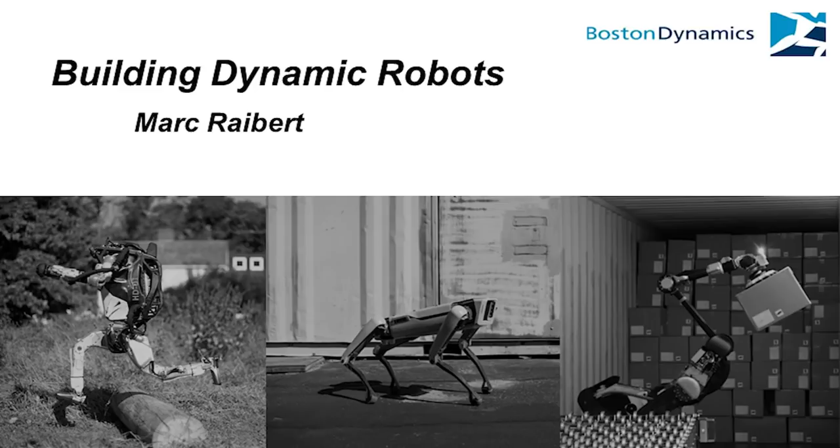But before I do that, I'd like to set some context. And the context is how to think about intelligence. At Boston Dynamics, we've been focusing on what I've been calling athletic intelligence. That's intelligence about how we use our bodies, our ability to walk and balance, the knowledge of our bodies that lets us do energy efficient motions so that we can travel further or actually be stronger given the hardware or the meatware we have to work with. And it lets us maneuver in real time in the world.

Imagine playing basketball or ice hockey or whatever your sport is, the way you can maneuver among your opponents, not collide, go around. All those skills are a very tight connection between our bodies, our sensors, our brains, and I've been calling that athletic intelligence. Most of us aren't real athletes, but we all exhibit and rely on a great deal of athletic intelligence. The other kind of intelligence is cognitive intelligence.

That lets us plan activities. For instance, when I was flying and I'd want to get to the airport on time, I'd have to plan out, okay, it's rush hour. That means it's going to take this long to get from my house to the airport. You have to get there 45 minutes early or whatever it is. And so you go through this sequence, and that's cognitive intelligence. And I think, frankly, most artificial intelligence that's being studied now is more on the cognitive side.

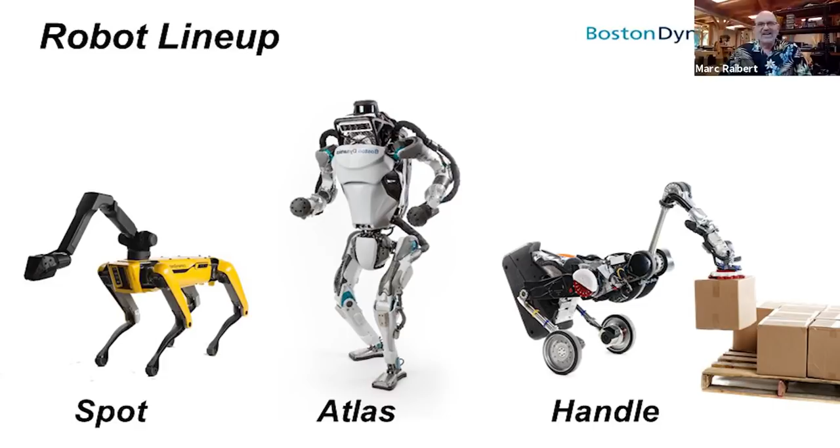These are the 3 robots that we've been working on at Boston Dynamics in recent years. There's Spot, Atlas, and Handle. Handle is a logistics robot. I'm not going to talk about that today because there's only limited time, and I'm going to focus on Spot and Atlas. And these really represent 2 different major thrusts from our company.

After many years of work on probably 8 or 10 different quadruped robots, we are commercializing a productized version of that. And it embodies athletic intelligence the way I've been describing, but it also is a host that other people can put their cognitive intelligence on top of. And I'll be showing some videos of what Spot can do and how people are using it.

And then Atlas is a research platform that lets us explore the present and the future of dynamic control in robotics. And we've been working on not only producing more and more behavior, but also techniques that let us rapidly create new behavior. And so I'll give a little bit of discussion of that. The other thing about Atlas is it's a platform that shows how important hardware can be in robotics. I know in the AI world, software is king, but it's not all about software in robotics. The hardware is just as important, and I'll say just a couple of words about that.

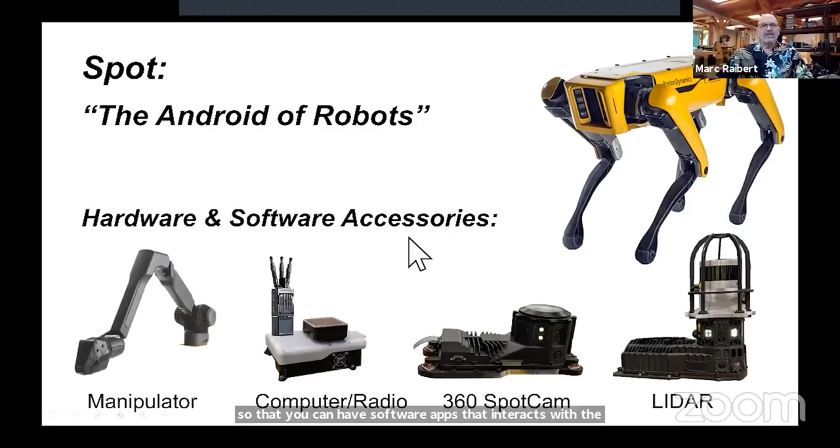The control system for Spot, there's really a lot of different things going on, but I think you could cover the essentials in talking about 4 layers. The bottom layer is servos that control the joints and kinematics that can be used to coordinate the joints.

One level up is something that's worrying about the dynamics, the balance, the stability of the robot. And, you know, 4-legged robots that move quickly are really very complicated dynamic machines. And we've been using an approach called sequential composition, which allows you to break up the very complicated dynamic space that's composed of both the physical configuration of the robot, but also the physical configuration of the task. You can break that up and separately come up with controllers that have some desirable properties about stability as you do switching between the regions.

And Al Rizzi and his coworkers before he came to Boston Dynamics really provided the foundation of sequential composition. And we've been expanding and building that. And it's been a great thing for us.

The next layer up is something that uses the visual system to analyze the terrain around the robot and then decide how to move the body and how to move the feet in cooperation with whatever the user is asking the robot to do. And so this little picture shows a body obstacle, foot obstacles, desired footsteps, and then quadratic programming is used in a repetitive manner, I think 10 times a second. It looks out to a limited horizon, doing quadratic solutions, and then adjusting the foot placement, the body path, to keep the robot balanced, but to keep it on course the way it's supposed to go.

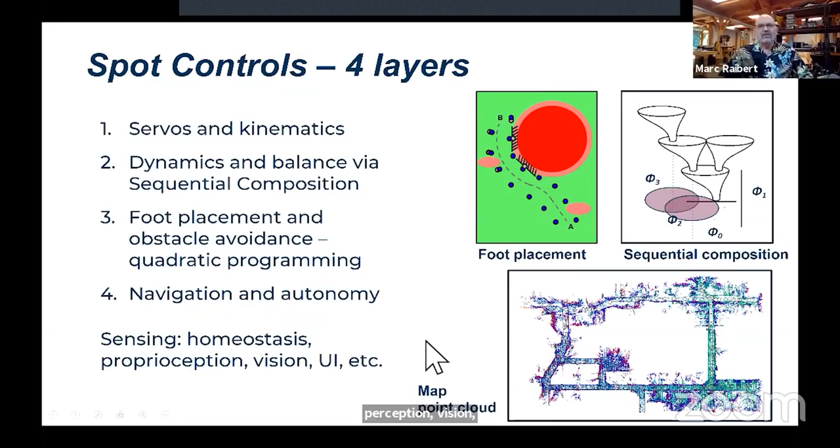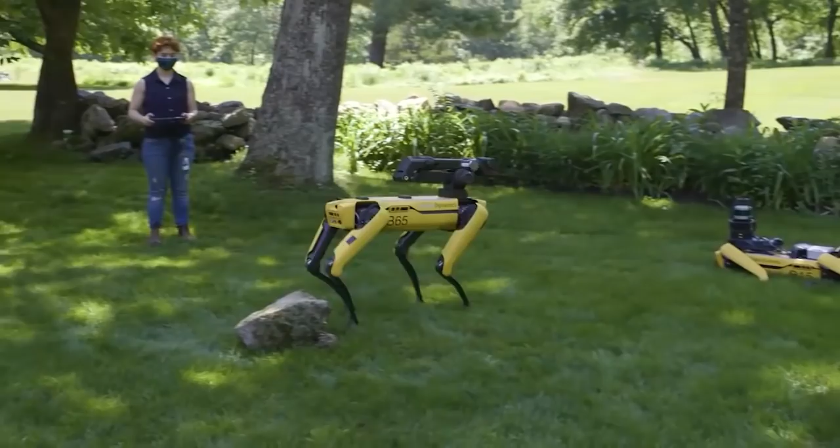So here's just basic Spot behavior in case you've never seen it before. The robot has a bunch of different walking gaits that it can use and running. It's got cameras in the front and on both sides and in the back. I'm showing those cameras. Those are stereo cameras. And when you put all that together and all the control I just mentioned, the robot can step over things that it sees. It can do it backwards, sideways.

It can avoid obstacles. In this case, I'm an obstacle. Daniela has a controller and she's steering, but she's just telling it to go straight ahead at me. And then the robot sees me and moves around using that quadratically programmed foot placement algorithm and body placement.

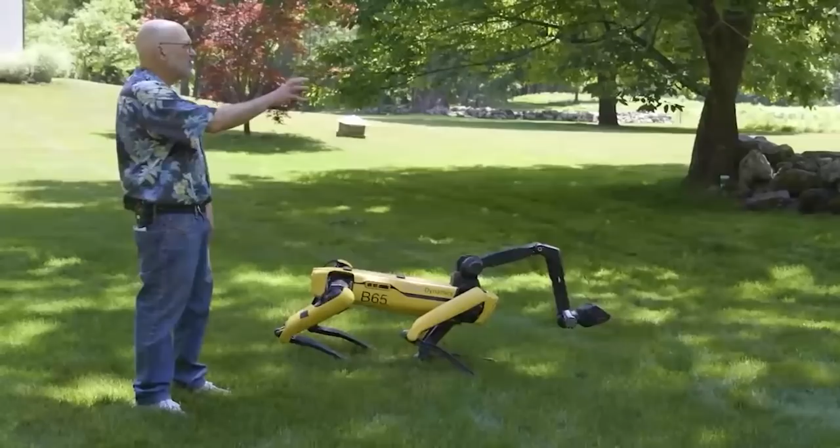And we also have an arm, and I'm really excited about the potential of an arm on a moving base like this that can pitch, roll, and yaw, and also travel, in order to extend the range of the hand.

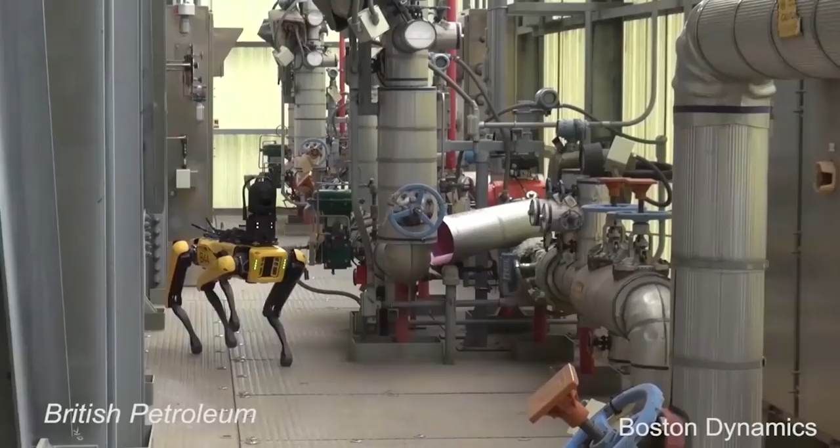And this is just a quick example of the autonomous traversal. We previously ran the robot around this building and collected point cloud data from both a LiDAR and the onboard stereo. And here it's doing matching between the real-time data that's coming in through the sensors. And so you're sort of seeing inside Spot's brain, and it's matching that against the data that was collected at mapping time. And that allows it to go on traversals such as this. But now we're using that to traverse very complicated sites, which I'll show you shortly.

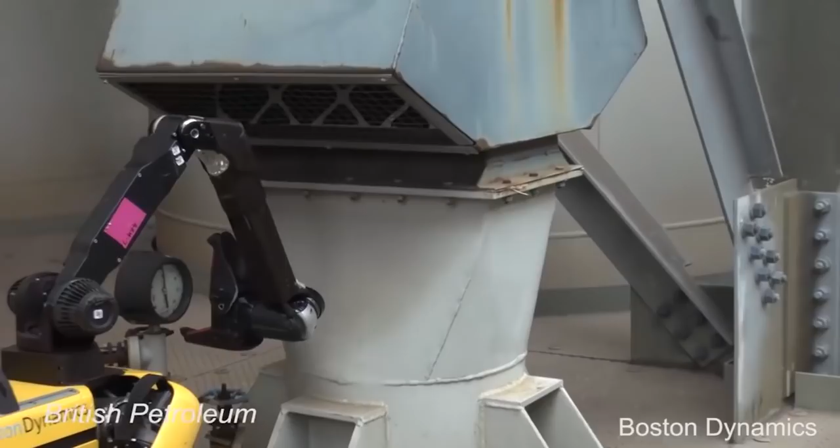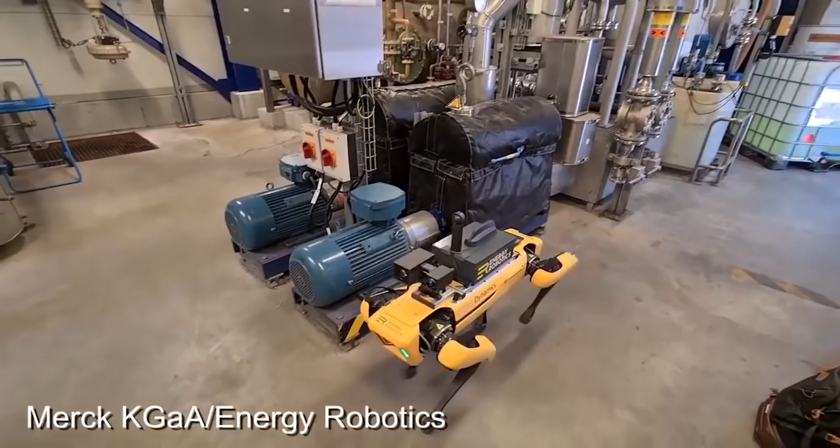In fact, this video is showing real-world applications, in some cases tests, and in some cases deployed applications of Spot, where we're working with customers. We're relying on the athletic intelligence of the robot combined with sensors provided by the customers, or in some cases, cognitive AI that's being run in apps that's externally connected to the robot.

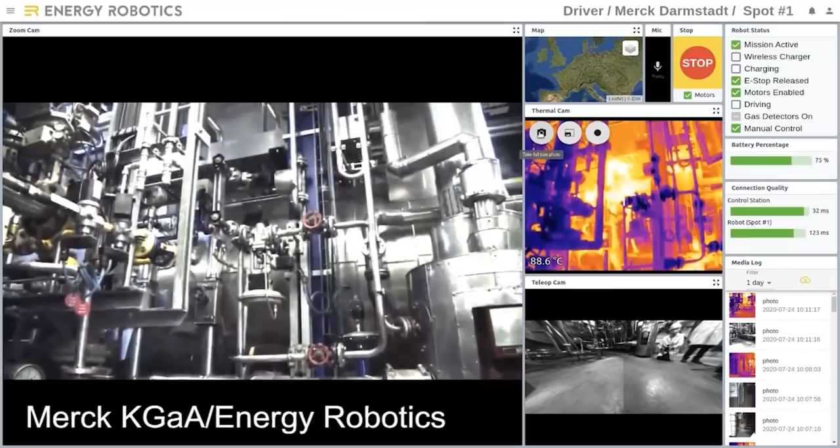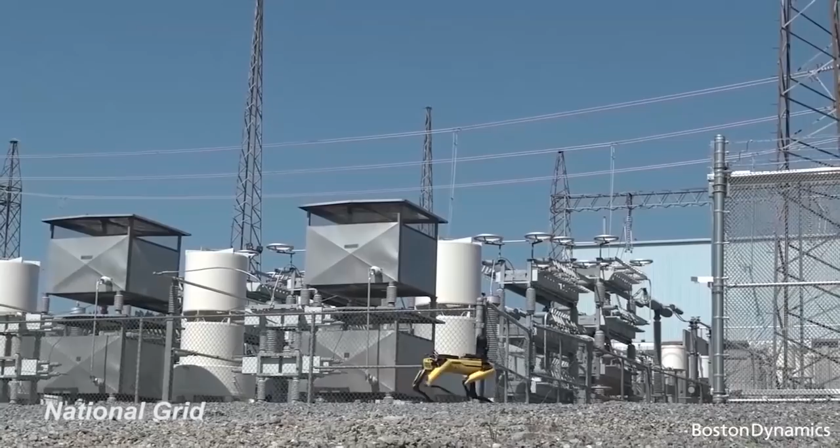That was a British Petroleum refinery in which there's many inspections that are currently done by humans, but it's really unpleasant and somewhat dangerous in these places. This is a Merck facility where they're interested in assessing the performance of some of the machinery without having people have to go there and be exposed to the risks.

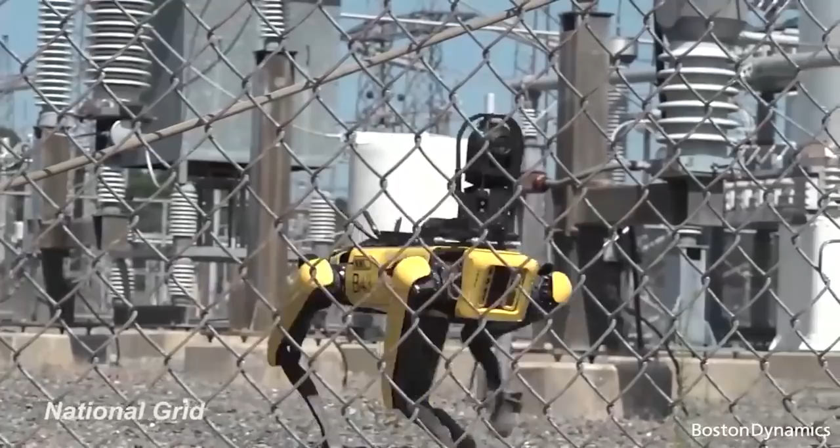This National Grid facility has places where humans aren't allowed to go when they're powered up. And so they can't do inspections except when the place is powered down. They use our robots to do it.

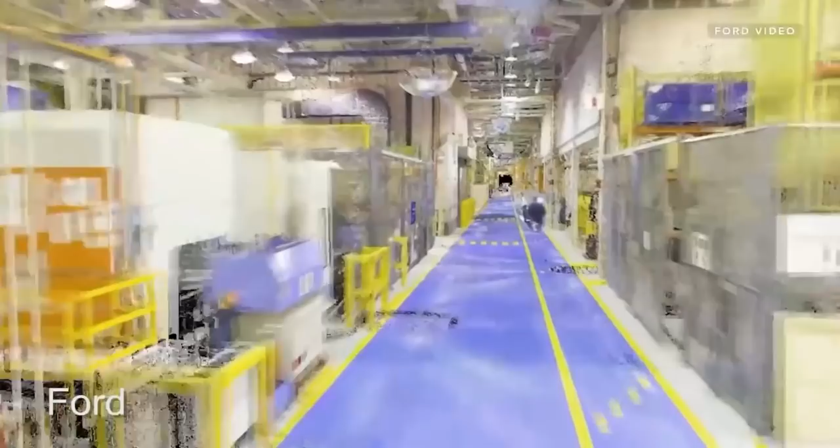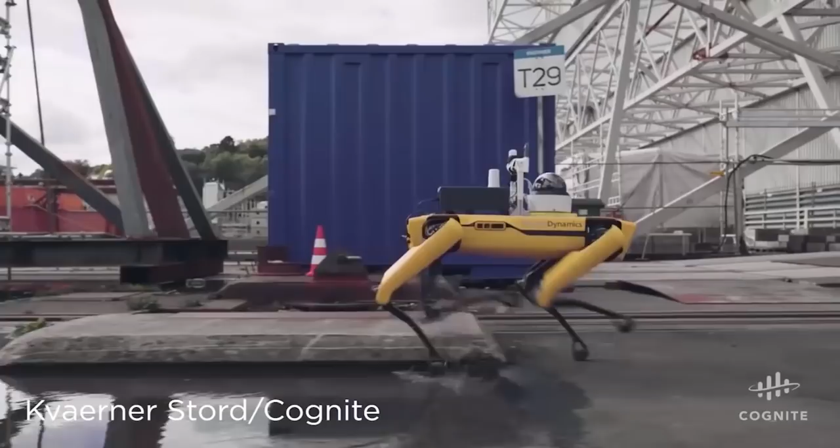So that's dull, dirty, and dangerous. This is construction industry where there's an interest in collecting maps of environments that are being built on an ongoing basis. This is Ford mapping some of their facilities using onboard sensors. And I believe that using sensors on Spot is going to provide better data more often, more reliable than can be done with people carrying the sensors, which is how it's usually done now.

This is a facility where there are tens of thousands of components; they're creating oil rigs and refineries and things like that. And they have to keep track of all this stuff. So they're using systems that collect data from the robot and then organize it all so that managers can have a better view of what's going on.

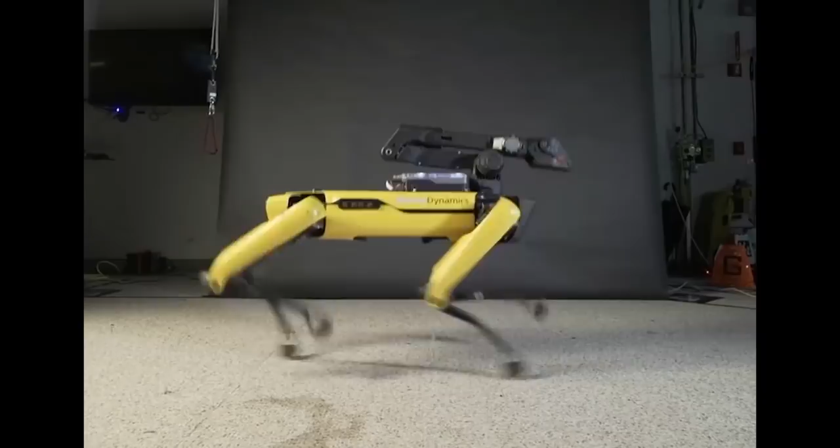This is just a charming test application of Spot. You've got the boom, baby, give me some room.

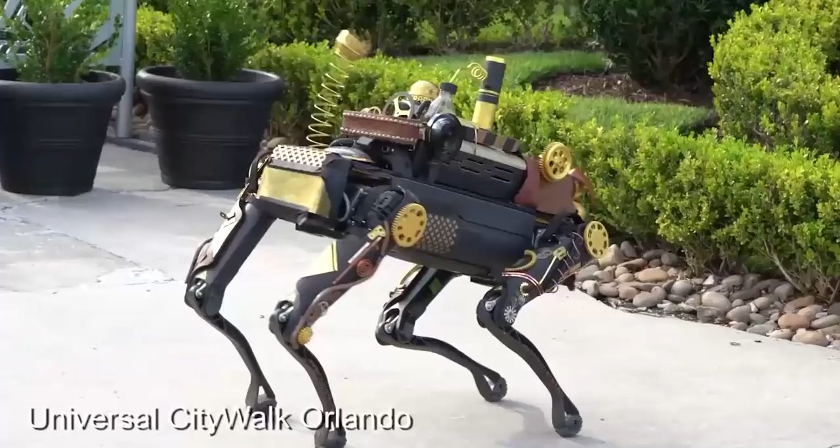You know, about a year ago, we made Spot do some dancing. And Spot dancing has stimulated a variety of applications. You know, the fans can't go to baseball games anymore. So the SoftBank Hawks bought 20 Spot robots to do a little dance performance to liven up the event.

And if you'd like to see a Spot live, you can go to Universal CityWalk this month. They're testing out a kind of steampunk version of Spot, and they have it combined with some human performers in order to entertain visitors to the theme park, which has just opened back up. Universal is doing a bunch of other stuff, which isn't public yet, but I'm really excited by it. And we have other customers who are interested in entertainment uses of robots, and it's going to be interesting to see how that develops.

But you know, back to one of the themes of this mini series of lectures, COVID. One of the things we were able to do a few months ago was apply Spot to a COVID problem. Some of the researchers at the Brigham and Women's Hospital here in Boston, who are emergency room people, came to us and to some researchers at MIT with the idea that rather than screening potential COVID patients live, they could screen them with a robot with some telepresence, plus have sensors on the robot read vital signs. And so we very quickly got a robot instrumented.

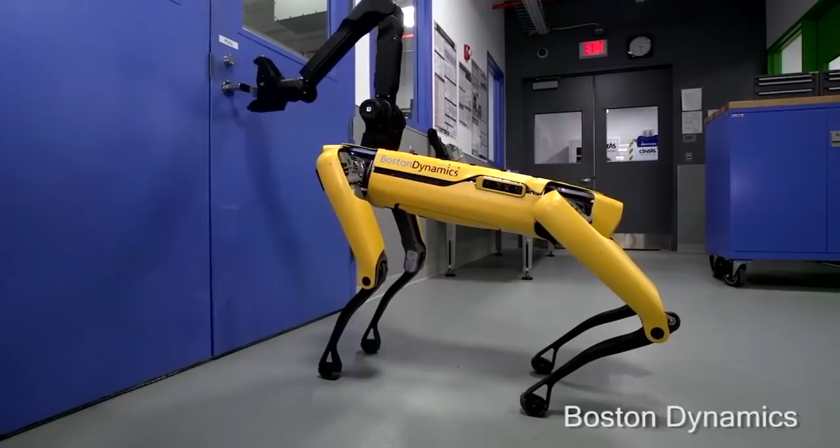So I wanted to show just a little bit of what I'd call futures for Spot. Right now, you can't buy a Spot with an arm on it, but it's going to become available very soon. And I'm really excited by that. The new arm is really fantastic, very lightweight. This isn't even the production version. This is a video you may have seen 6 months ago.

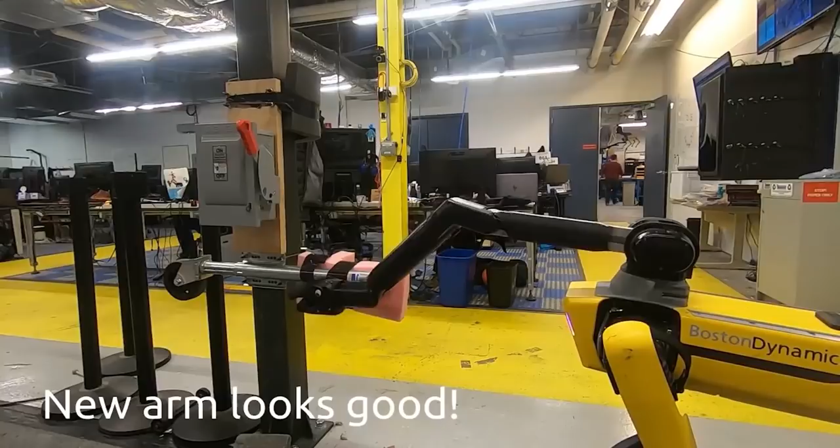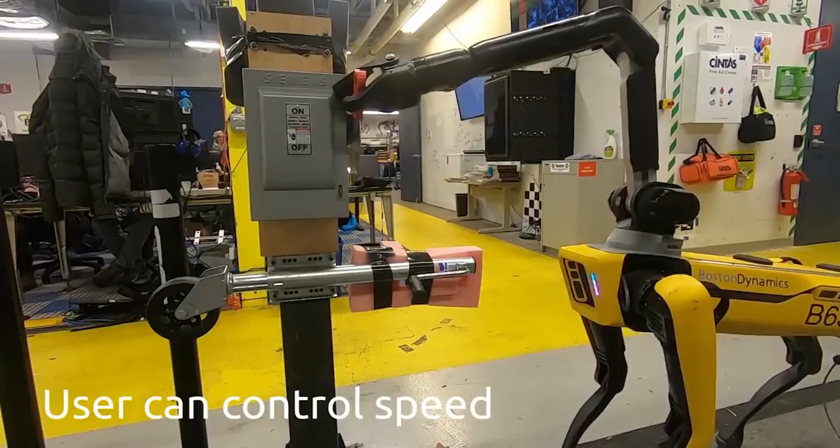But developing the athletic intelligence for the arm is a huge challenge. And I think that users are going to have to do a little more of the athletic intelligence. And of course, we're trying to provide the right kind of interface for the cognitive intelligence of doing mobile manipulation. We've been doing some experiments, and it's really fun to see all the different kinds of things you can cook up when you have a mobile base and an arm. Here we're dragging furniture around.

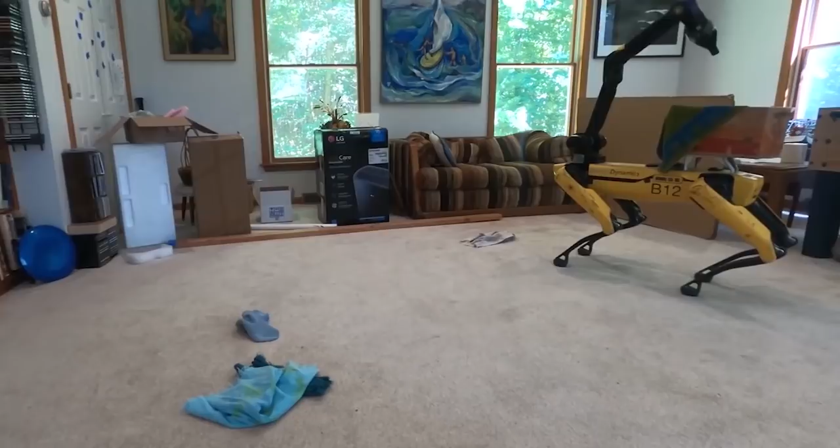We've dragged some heavier furniture. This is an interesting demo. We have 70 people with robots at home. So one of them decided that he would use the robot to clean up his house. And so he's got some off-board vision, so basically cloud-based vision, looking at the view from the cameras in the robot and identifying things that shouldn't be on the floor.

You'll see the view from the cameras on the robot. It's identified this as a mess. And so then the robot figures out how to get over there and get the hand and do grasping. There's all kinds of grasp pose calculations going on in order to make this work. And then it's collecting the stuff.

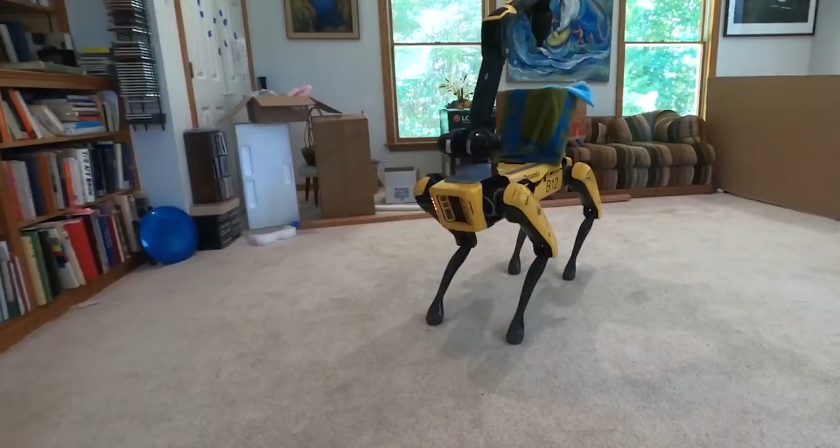So I don't know about you, but when I had a house full of kids, I would love to have a robot that could go and straighten up the house. Even without kids, I'd like to have a robot to straighten up. Don't get me wrong, we're not selling Spot as a home robot. It's really not there yet.

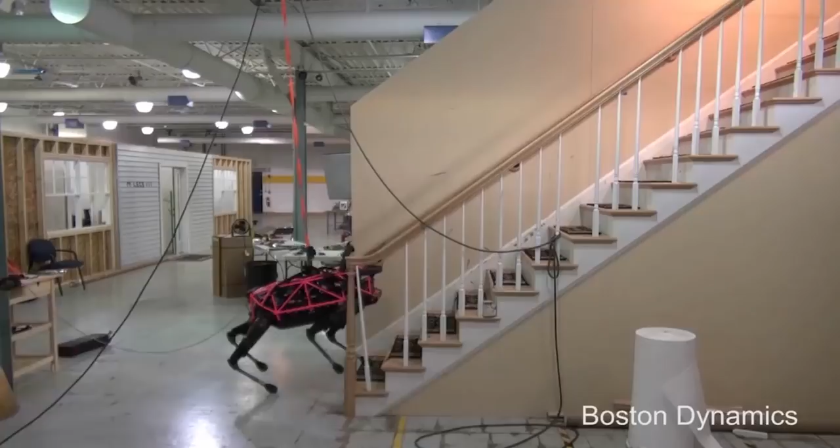And I wanted to go back to a theme of the control that I didn't talk about before, which is robust control of the robot. One of the things that we've been working really hard on in our athletic intelligence is making it so the robot can perform the task even when the situation isn't precisely what we had planned. So here, our engineer is kind of disturbing the dynamics of the situation. And then we have programming that can deal with all those situations and get it back on task.

Here's another example. The robot's climbing stairs using the foot placement algorithm. But an unexpected force is moving the robot during the climbing, and the robot can recalculate using sequential composition to use a bunch of different controllers that work in the outlying areas and bring it back.

This kind of demo is one of the reasons I think that athletic intelligence, at least when it's implemented in a full-blown way, can make it much easier for cognitive intelligence to function. If the athletic intelligence can deal with a wide variety of circumstances, the cognitive intelligence can plan in a simpler world and be faster, maybe more complicated by having bigger environments that it's doing its planning or reasoning or recognition type functions in.

So I'd put this question at this point in the talk: do you agree that athletic intelligence makes cognitive intelligence easier to implement and more effective?

Do you want me to switch over to the Slido again, or people can? We'll just leave it like this. Have to unmute. Yes. So I think we've got a response to that question. So I think people can still continue to vote, but I would keep going.

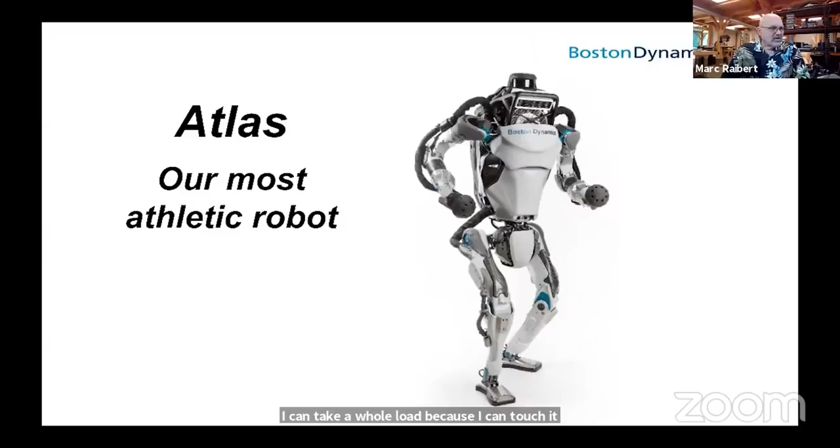So I know I'm going long on time, but I'm going to just say a little bit about Atlas. And one of the key points about Atlas, and really all our robots, is hardware is really important. And in today's world where there's so much being done in a fantastic way with software, I think people lose sight of that. And they think that software will solve all the problems of the physical world. And I believe that the right approach is to make the hardware absolutely as robust and capable and advanced as you can. And then software will embellish it and take it even further. But don't start with crummy hardware and hope that software will make up for all its failings. I think the problems to solve in robotics are too hard to rely on that approach.

So given that, we've done a ton of work on Atlas. We have a power system that involves a very compact hydraulic power unit that has motor, pump, reservoir, filters, all in a 5 kilogram unit that can produce 5 kilowatts of output. Very advanced battery pack with all the kinds of things you'd expect in a sophisticated battery system.

And we've also built our own hydraulic servo valves that are much more efficient, that have some circuits that do computing that are particular to robotics that people who use hydraulics haven't needed in the past. We've also jumped in with both feet for using 3D printing to make our robots much smaller and lighter. So we've been embedding actuator components, hydraulic pathways in the limbs.

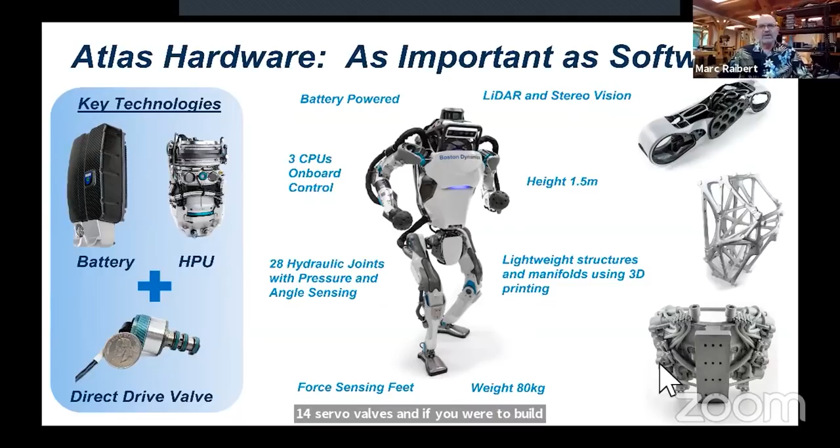This is a manifold that supports, I think the number is 14 servo valves. And if you were to build this out of separate fittings and hoses and mounting points, you'd end up with something that weighed 3 times as much. And using these techniques, we were able to go from the first humanoid we built, the one that was used in the DARPA Robotics Challenge about 3 years ago, maybe 4 years ago, that weighed 375 pounds. We've been able to get it down to just about my body weight, 165 pounds and form factor.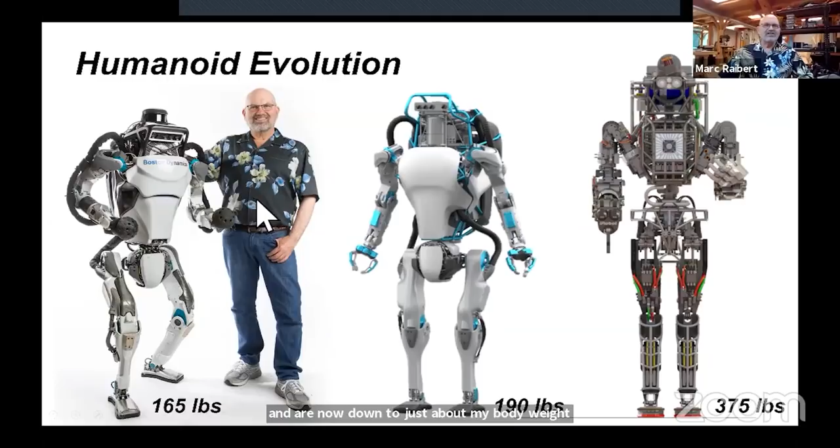I think the current one might have put on a little weight. I actually lost a little weight. So Atlas might be heavier than me today.

And then what about controls? I am just going to touch on the controls in Atlas, and I'll give you a reference to another video that Scott Kuindersma made recently that really goes into lots of detail in how Atlas works.

But the basic approach we've been using for the athletic behavior I'm going to show in a moment is to build up a library of highly optimized behavior where we use model predictive control and other optimization techniques to figure out what set of trajectories, actuation, and servos can produce these dynamic behaviors. Then in real time to use vision to assess what the scene is, find footholds or handholds in some cases. I'm not going to show any handholds today. And then come up with a behavior that fits elements of the library in sequence into the action. And it actually does this fitting in real time.

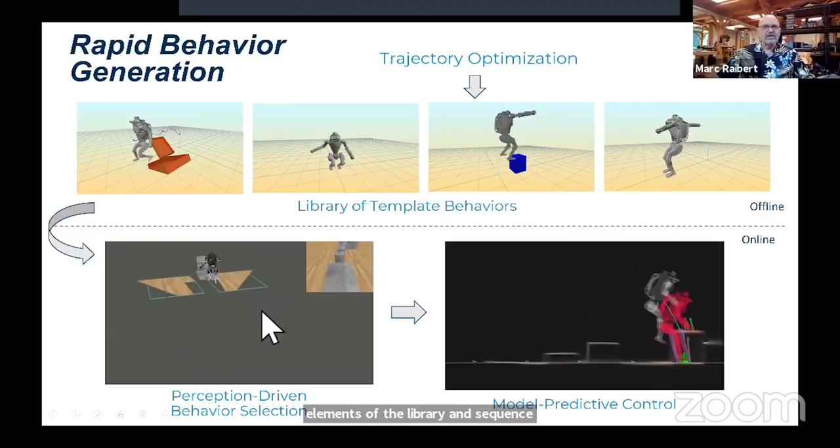And if you look at that from an optimization point of view, there's an offline part of the process. First of all, we deal with the core dynamics of the limbs of the robot, and then take into account the kinematics that are determined by the task we're trying to perform. We do offline optimization in order to come up with the elements of the library. And then in real time, we stitch those together. We stretch them and shrink them in order to fit the exact real-time situation in order to perform.

And I encourage you, if you're interested in the technical elements here, to go watch Scott's YouTube video that was put out just a couple of months ago, and you can search on this title, Recent Progress on Atlas, the World's Most Dynamic Humanoid Robot. Really a very nice presentation.

So Marc, can I just quickly ask a bit of clarification here? I think there's been tremendous interest in this aspect from lots of people. So when you do the offline versus online computation, what is the granularity of the dynamics you use in each of those stages? Are these centroidal dynamics? Are they full dynamics? Is there some abstraction at each of these levels?

So I think one key point is that in the offline version, they're much less abstracted, but there's always abstraction. In a robot that has as many links and as many joints, I think there's 28 actuated degrees of freedom, dealing with the whole dynamics, plus the change in contact dynamics, the compliances, a lot of the behavior is determined by actuator limitations. So you're up against constraints in the strength, in the range of motion. All those things vastly complicate calculating anything about the dynamics of these robots.

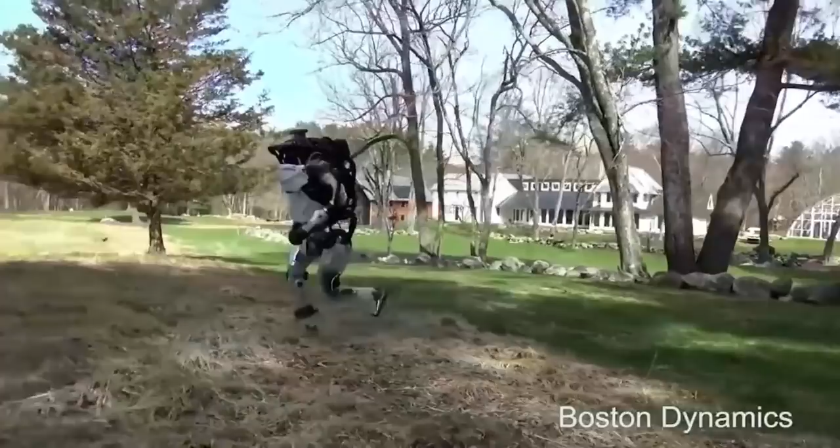We're doing a production right now, which I'll tease you about because you'll see it by the end of the year, I hope, that has these rapid generation techniques, and it's really paying off. We can turn around new behavior in a few hours where it used to take days, weeks, and sometimes months. So let me just show, this goes back a ways. Some of this stuff goes back a couple of years.

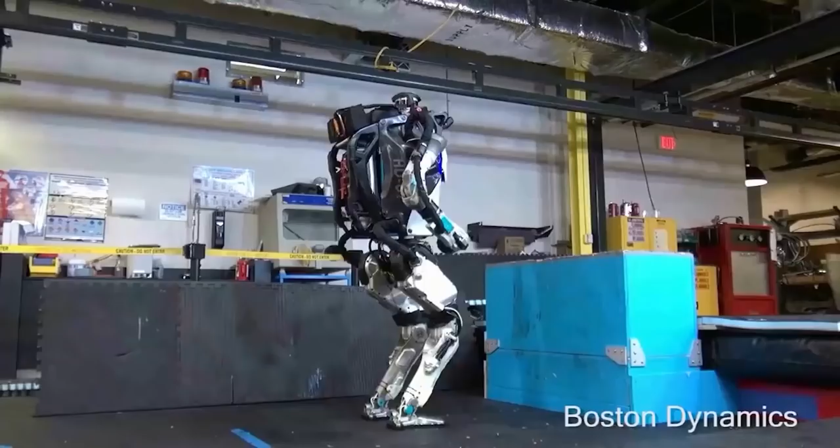This might be one of the most dynamic maneuvers we ever did, but there's very little vision being used here. This was all planned out in advance. There's obviously control going on in order to stabilize in the scenario. Here's the first time we did gymnastics with rolling type behavior, where we have contact not just with the feet, but with the hands and the body.

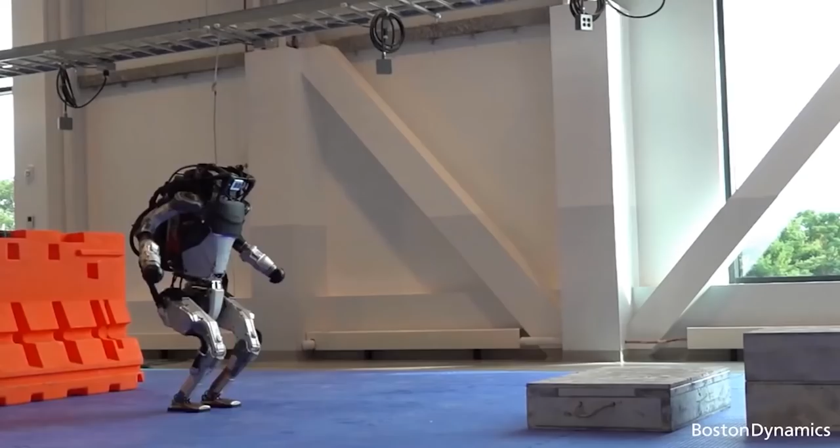That jump was done with some of these optimization techniques. Here's another one that's very hard to perform, and the optimization is really paying off. And this was just done recently. Here, vision is being used in real time to locate the boxes. Someone could actually go and move the boxes while the robot turns around, and it would run back and see them. I'll show you a little bit about what the visualization of the vision system looks like when it does this.

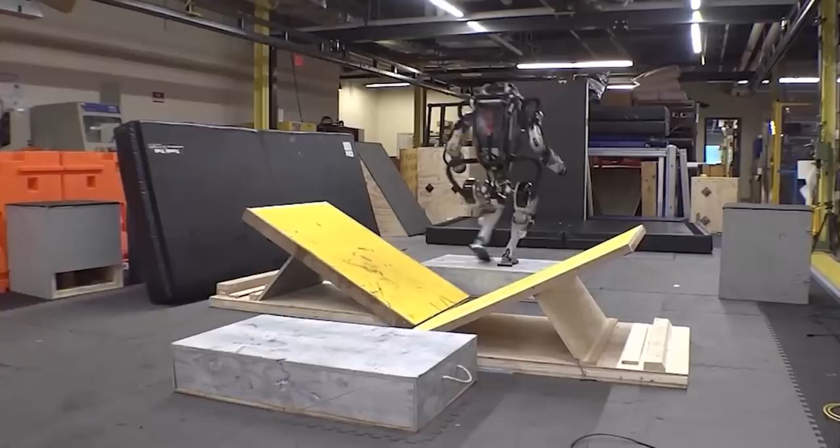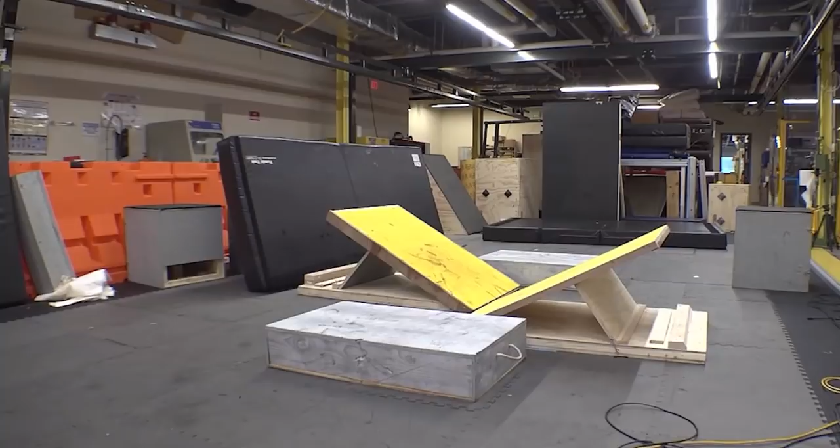So that's actually the end of, let's see, I should stop sharing. That's the end of the materials I had prepared. Looks like I'm way over time. That's okay, Marc. I mean, this was exciting. I think you already touched upon many of the questions that we had in the back of our minds.

So this is already getting to the point where we can delve a bit more into some of the audience questions. But I think the next thing on the agenda is actually me driving the Spot Mini from Edinburgh all the way in Boston. So this is a tremendous example of how we can sit in a different continent and, in spite of all the feedback delays, create very interesting behaviors.

So maybe let me jump in here and say, you know, we've always been interested in combining human intelligence and artificial intelligence on the cognitive side.

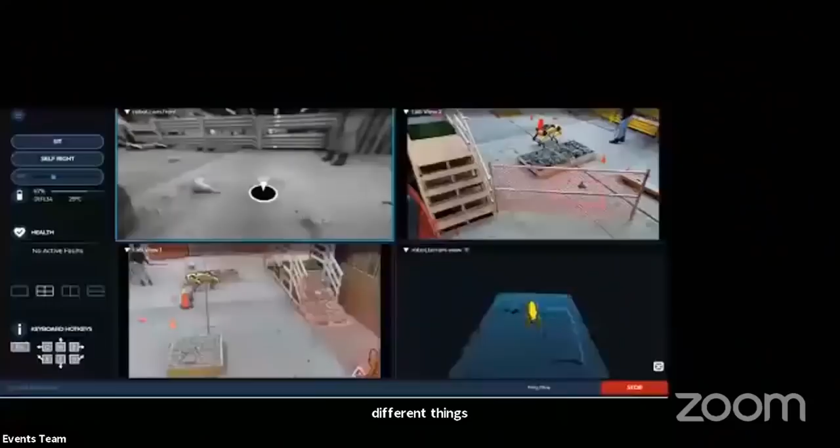Yeah, so we don't have sound from Sethu, but he's got a user interface in which he has a couple of different views of the robot, some from the robot and some from nearby. I wish I could hear. So yeah, I think I'm a very bad games player, so I'm not very good at gaming. So in spite of that, I think it was great.

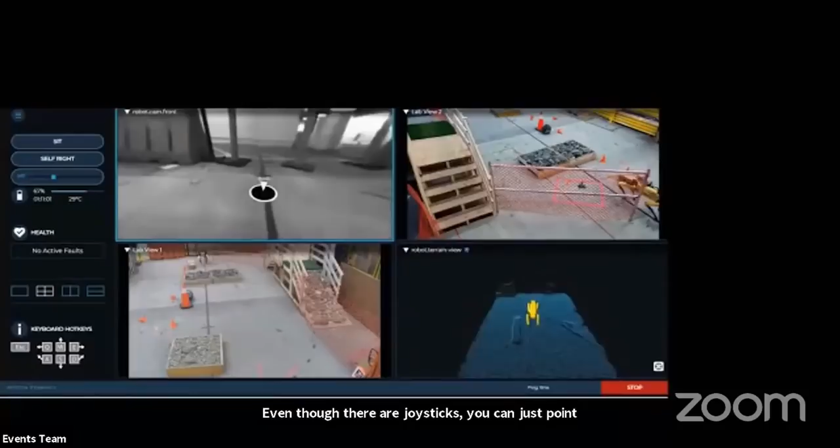So even though there's joysticks, you can drive it with joysticks. You can also just point at a place in the screen, and that's what he's doing in the upper left. And then the robot will go to that. So that's a view from the robot's camera. It kind of figures out where it is that you're pointing using the ground plane. And then it will plan an activity that gets it there.

And I think the one thing I found very intuitive was the bottom right, where it builds a map in real time that helped me. I mean, amazing. That was the most intuitive for me to kind of drive the robot over. So that was a great interface.

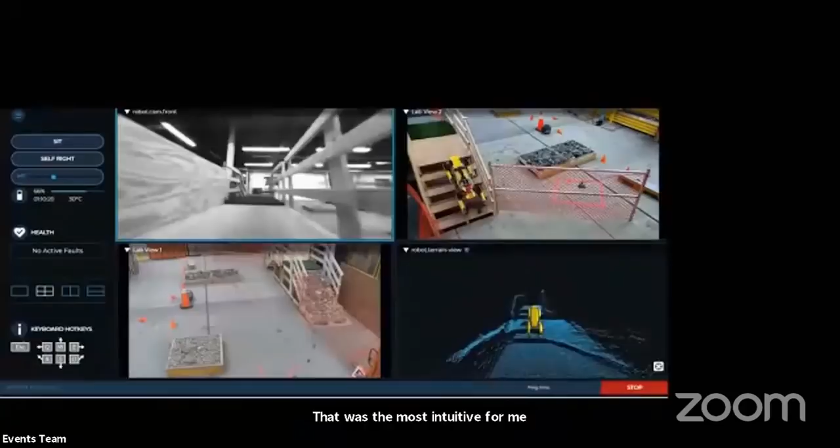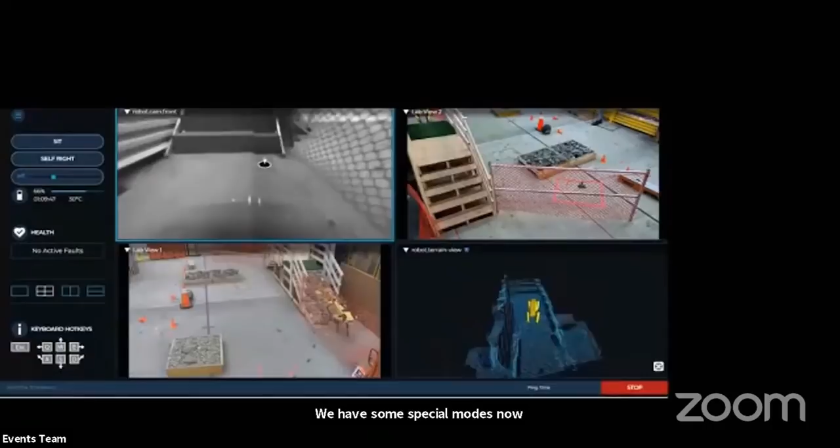Yeah. And you know, Sethu really isn't responsible for the details of the stairway here. The robot is using its vision system, using all that foot placement stuff. Stairs is a big deal, especially for these industrial applications. And we have some special modes now where the robot can use a model of the stairs, so more cognitive type things, in order to robustify its behavior in those complex situations. But here it's really just using vision and real-time placement based on the perceived shape of the terrain.

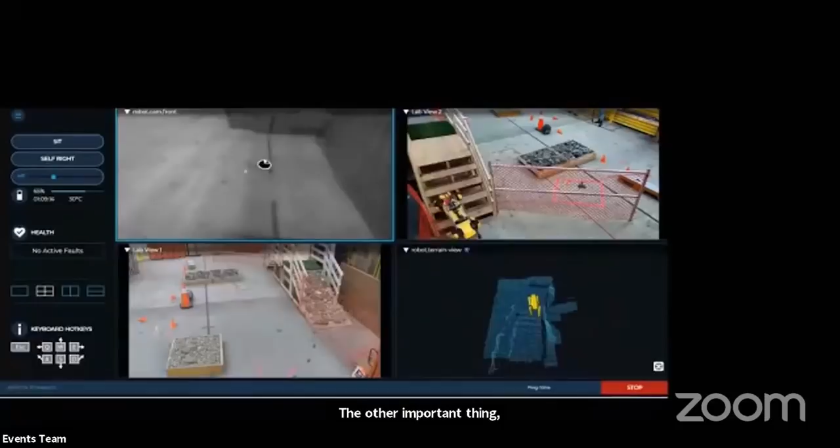Yeah, and I think the other important point here is that with the user interfaces, there are many options. As I said, joystick, the usual keys, a real-time map of the world, and perhaps going forward, something more intuitive, where you use the human body as a way of directing this. So again, just to reiterate, I'm sitting here in Edinburgh driving this, and the robot's in Boston in the Boston Dynamics lab. So that was great.

So I believe our marketing team uses this. And if some of you in the audience turn into prospects, that is potential customers for Spot, you can talk the Boston Dynamics sales guy into letting you drive the robot from wherever you are in the world. We've done Asia to Boston. Obviously, we've done cross country United States. We actually have an office in California now, so we do operations like this across there, and we did it from the UK. Perfect. Thanks a lot, Mark, that was amazing.

So we've got a few things left in today's schedule. The first thing is we're going to go live to the lab in Edinburgh, the Edinburgh Centre for Robotics, and show you a little bit of what's happening in the UK in terms of the kinds of robots and the kinds of research. To be honest, in our lab, we built a few actuators and things, but we source excellent hardware from all around the world and do research on exactly the control and planning aspects of things.

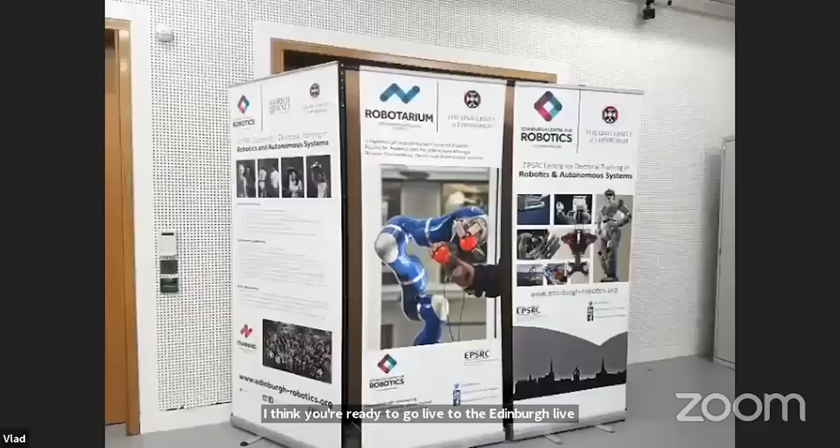So I think we are ready to go live to the Edinburgh lab, and I'm going to hand this over to Vlad, one of my senior postdocs, who will show us, and that's the live feed from the lab here in Edinburgh, and the Edinburgh Centre for Robotics.

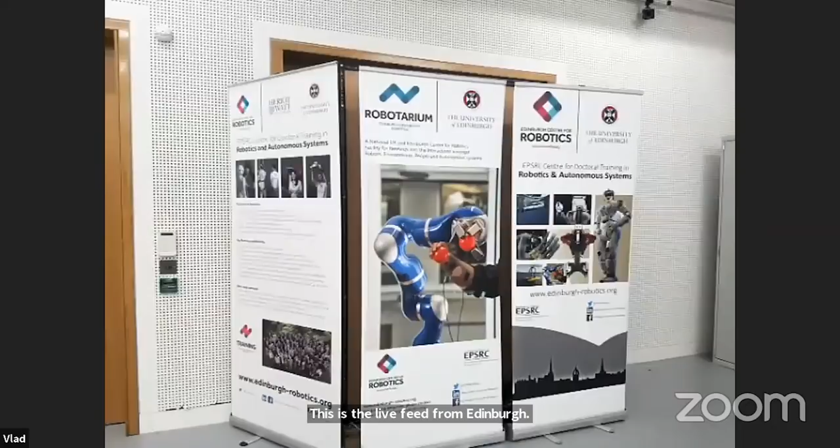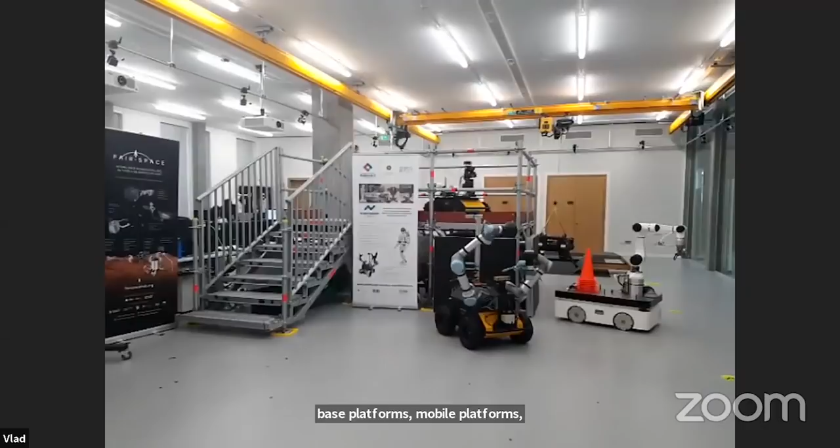It's a joint venture between Heriot-Watt and Edinburgh universities, and we do everything from training students to working with different kinds of platforms, so fixed-based platforms, mobile platforms, and the kind of rigs that Mark mentioned as well. So we have a research agenda with fixed-based platforms, so multiple robot manipulators using planning and real-time sensing technologies to do impact-aware, collaborative sharing of load with humans.

Then we have these kind of manipulators on mobile systems, so wheels. So again, we use whole body motion control to do impact-aware and sensitive collaboration with what we call shared autonomy, where humans give the high-level goals and the robot does the rest. And here you can see the ANYbotics ANYmal robot. So we do a lot of research on everything from footstep planning to navigation to real-time control on those platforms.

And I'm glad that Mark brought this up, because we also have an arm that's now mounted on the quadruped setup, such that we can do loco-manipulation on uneven terrain. So this is a lot of research on real-time planning, control, and sensing.

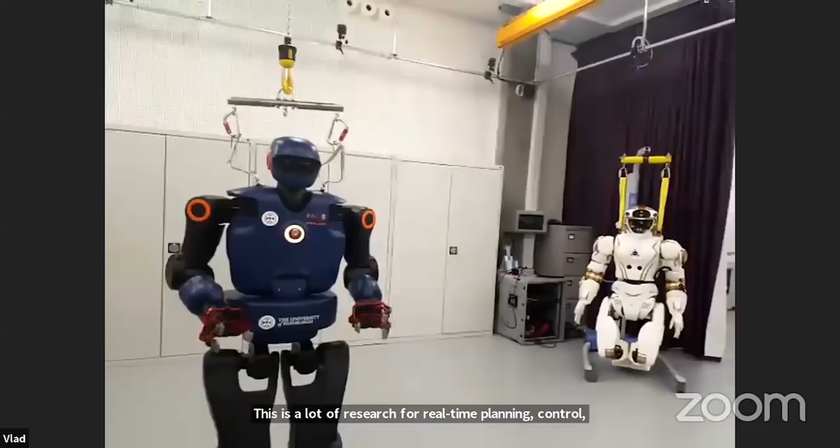And finally, we also have bipeds. So we are one of the only hosts in Europe hosting the NASA Valkyrie humanoid. So we've been working with NASA, the JPL, and IHMC and the other partners in the US to develop capabilities. But we also have a brand new humanoid platform, the wonderful PAL Talos humanoid, again, fully torque controlled, compliant.

We can do position control, but we can also do very high speed inverse dynamics based torque control. Some of the behaviors that you see are of course pre-canned behaviors, but the idea is we want to do full body motion planning, whole body control, and how do we not just avoid contacts, but actually exploit contacts to do some of the dynamic behaviors that Marc has been talking about. Obviously, having a very robust platform like the ones Marc has been talking about can hugely push the limits of what we can do and test.

So in addition to working with real platforms like these, we also have scenarios where we use digital twins, so real-world, real-time simulations to test our algorithms for everything from real-time planning and control to novel ways of representation of motion plans. So that is all with the full-bodied humanoid biped systems.

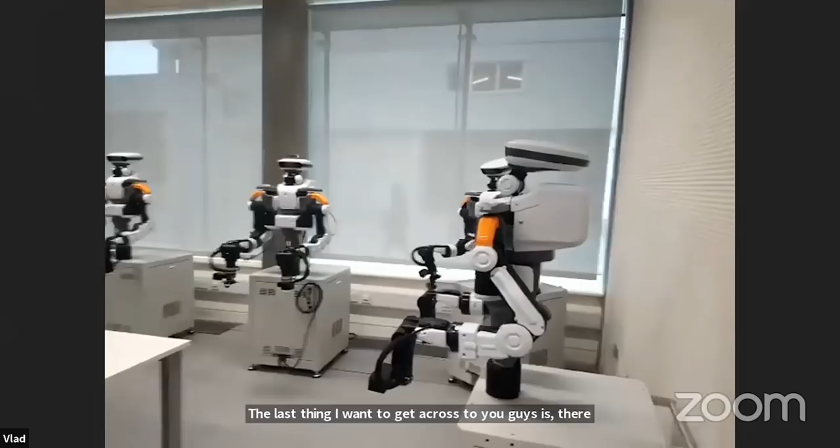And finally, the last thing I want to get across to you is there is a huge demand for people who understand robotics, people who are well-versed in everything from kinematics and dynamics to learning how to do the right kind of programming and coding for robotics. This is slightly more specialist than general software engineering. And so some of the humanoid platforms, the Kawada humanoid platforms that we have in our lab, are going to be used for teaching in many of our courses.

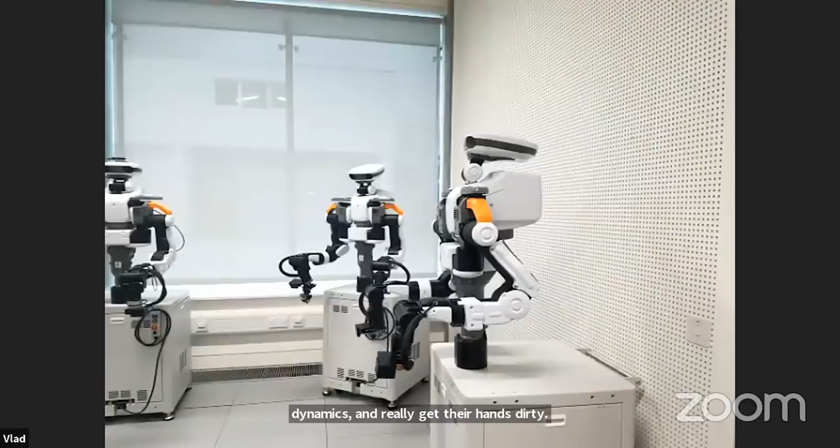So people who take courses as part of the Edinburgh Centre for Robotics get to actually code up some things in simulation and actually run some of those robots doing full-bodied motion planning, inverse kinematics, dynamics, and really get their hands dirty. Because as people who have worked with robots know, things working in simulation does not translate to things working on the real robot. So that's the setup that we have in Edinburgh.

It's an exciting place. I can't wait. Marc, go for it. I can't wait to hire some of those students. Send them our way. Absolutely, absolutely. Likewise, we would love some of you guys to come and spend some time here. So it'll be great to have that collaboration going.